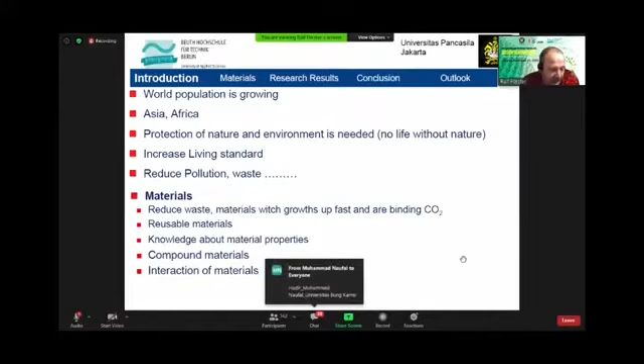We try to develop compound materials, and we must collect knowledge and experience about the interaction of different materials when we try to use the advantages of newly developed materials. We have to increase our knowledge and our skills, of course.

So we need other construction materials. We need some alternative building materials, as you know. The sand for mixing concrete to building beton is decreasing, and the prices for this material are increasing very fast.

One of our alternatives is wood. In Europe it's well known as a material for houses, for devices, and so on. Everybody knows this.

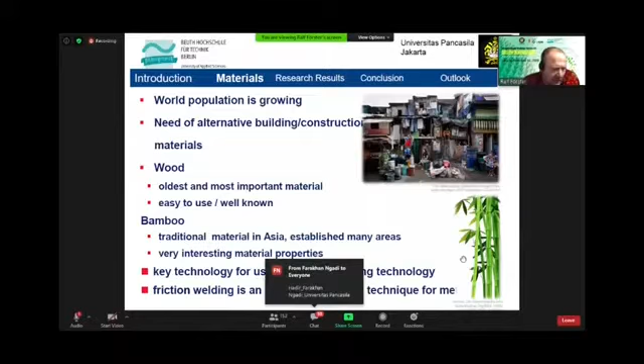In Asia, bamboo is well known as a traditional material with very interesting material properties. But we need some new technologies to use bamboo, like joining technologies. We have investigated in the last year the friction welding process on bamboo and wood too, and I will tell you something about our results and our ideas for new materials.

All of you know bamboo much better than the Europeans. The structure of bamboo is similar to wood, and the basic properties are also similar, but bamboo is a member of the grass family. It's not a wood, it's a grass.

There is a hard outside and a soft inside. It has very tear-resistant fiber strands, and most bamboos are divided by knots. The tensile strength of the bamboo grass reaches values up to 40 kilonewtons per square centimeter.

The main content of bamboo is cellulose and lignin, which is also similar to wood. Very interesting and very important for the connection of bamboo with the friction welding process is the content of lignin. The lignin content in bamboo is similar to wood, and that's why we can use our experience in friction welding of bamboo also for the friction welding of wood.

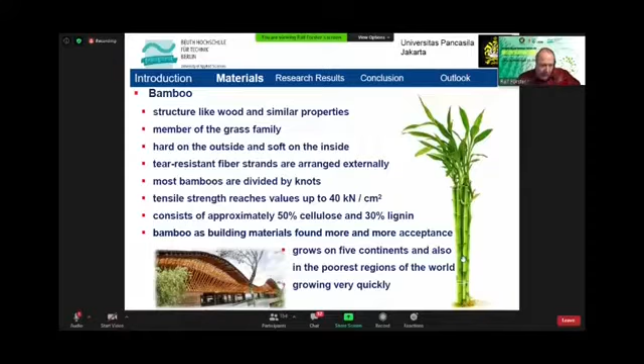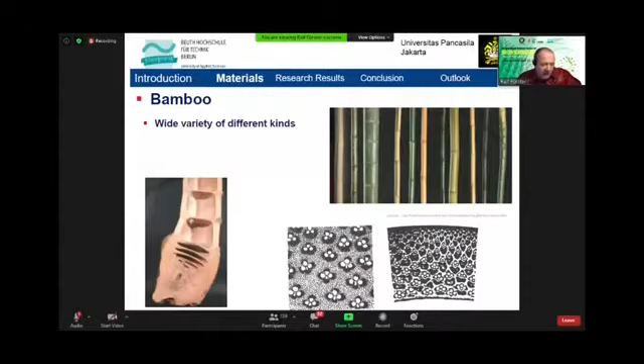Here are different pictures, cross-sections of different bamboo types. You know, there are a lot of different types and a lot of variety of bamboo. Here are the knots - this is a cross-section of a bamboo stem with the knots, the hard outside, and the empty inside with very stiff knots.

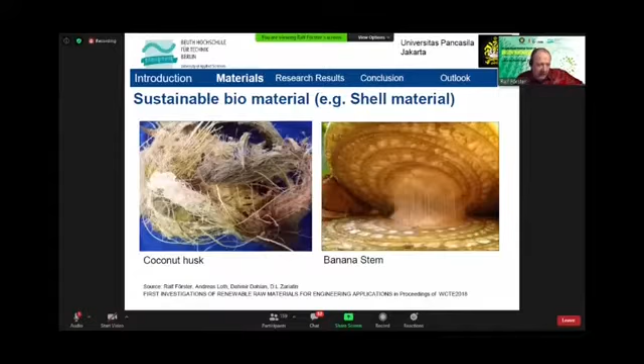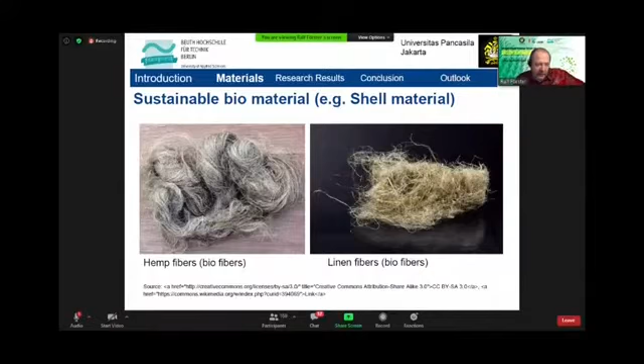So what are other sustainable, very interesting biomaterials? Coconut husk, banana stem, banana ropes, palm tree fibers - those are biofibers. These are very interesting for the next step, for outside material of sandwich materials, lightweight sandwich materials, like hemp fibers, linen fibers, and so on. There are a lot of ideas and opportunities to use such materials from a bamboo system.

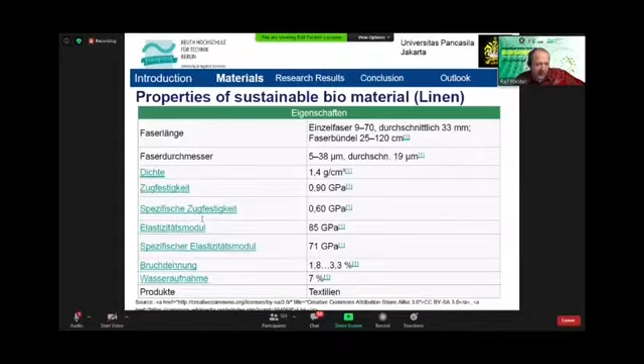We have some properties of such sustainable materials like linen, also for hemp. These are very often used in Germany or in Europe for ropes, for clothes, for pillows, and so on. But there are not so many applications with a technical or industrial background.

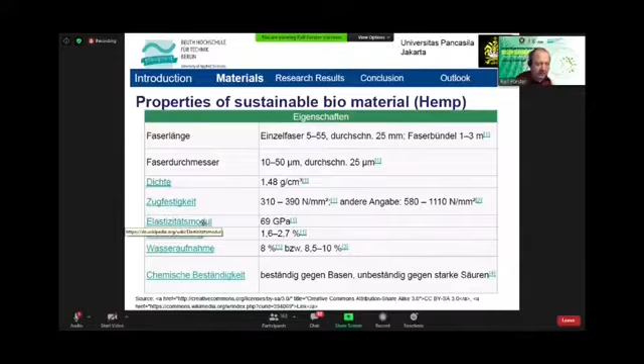But the advantage of biomaterials is that after using them, at the end of their use, there's no hazardous waste. They have no negative influence on the environment, and we can use them independent of our Earth's resources. But we don't have such standard values.

We don't know the properties of Asian biomaterials, like banana trees, like coconut fibers, and so on. And that's why we have to do a lot of research with these materials.

Last year was the year of Corona, and we didn't have the chance to exchange our knowledge. We didn't have the chance to travel to Indonesia to get more information about the Asian fibers and so on, but I guess next year we can cooperate together and try to find out more properties, and can increase our research in this topic.

So what we have done in the last year is install a cooperation with a Netzsch company. They are developers of special material testing machines. We have different chambers - we can adjust the chamber temperature between minus 160 degrees up to plus 500 degrees. We can measure different deformations of this.

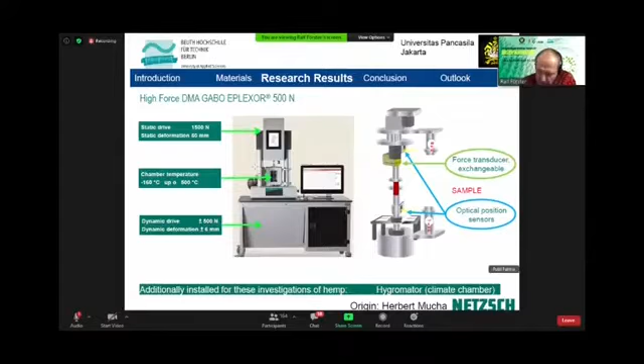Here are some tests which we have carried out with hemp fiber. We have a constant temperature of 25 degrees and a constant humidity of 20%, with a time sweep which increased the humidity stepwise, and temperature sweeps between 20 and 80 degrees at two constant humidity values of 40% humidity and 60% humidity.

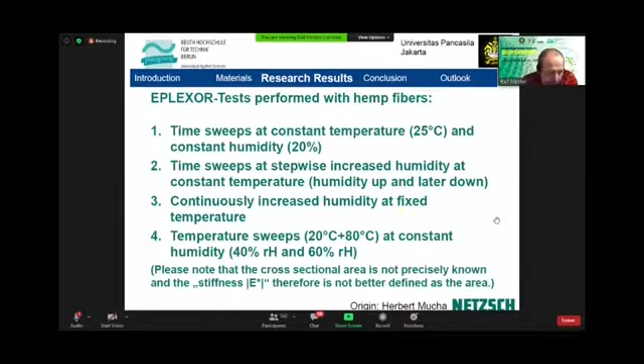So that we can collect first data with hemp fibers, we are trying to install new clamping systems for measuring really single fibers, very thin single fibers of our material, and we have seen how the behavior is changing during the time.

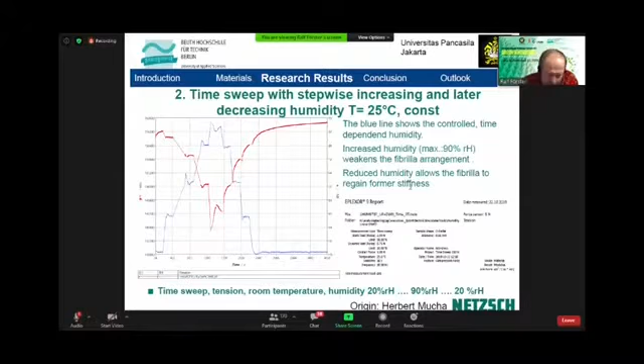Here are also some results with different humidity values and what happens with the stiffness of our material. Here are some other results about the tension, depending on different static loads and dynamic loads at a fixed temperature and with a continuously increasing humidity.

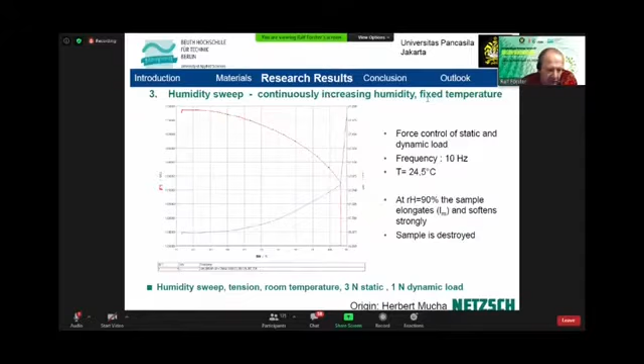Here are some other results. These are also results from one single hemp fiber, but for the future we must collect much more values for different materials and with different testing environmental conditions.

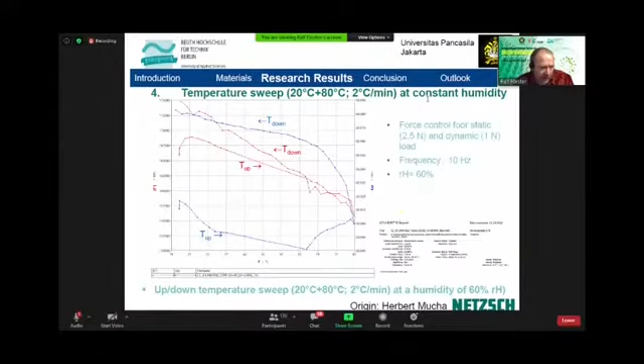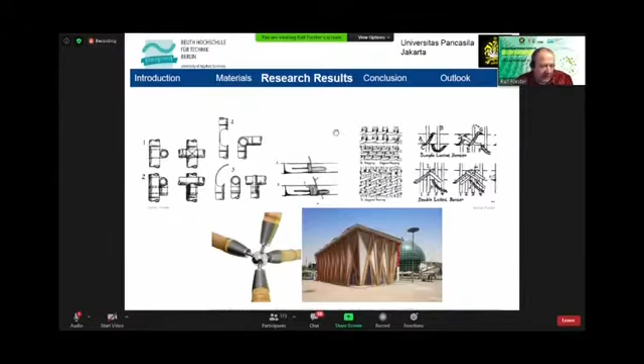What is a main problem of our research are the connections. Here are some traditional connection systems of bamboo and wood. We can join this with some ropes, with seals. We have metallic joinings. We can connect it with some bands and so on, like fibers, like thicker fibers, and so on.

But the demands for joining technologies are these: the connection should be free of chemical glue. It should be sustainable. We want no hazardous waste, and the connection should be reproducible.

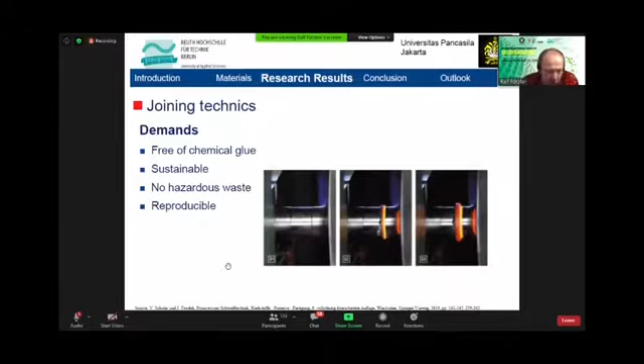This is a standard technology for friction welding. Yes, it is. As you know, the Germans like to make tables, to make standards and so on, and also the friction welding process has its own standard. We have the welding through movement. This means there is no external heat, no flame, no plasma, nothing.

We have an ultrasonic welding. We have some sonotrodes in this ultrasonic welding. This is very often used in the electronic industry, the semiconductor industry, like ball bonding, like ultrasonic bonding, if you want to connect the very thin wire of integrated circuits with the outside plating. This ultrasonic welding is used, I guess, in 99% of all connection processes, joining processes in the semiconductor industry.

We also have an ultrasonic welding process in the packaging system. If we cover some very sensitive devices, electronic devices, with some sheets of plastics and so on, the connection process very often uses also an ultrasonic welding process with a sonotrode. Then on the other side we have a friction welding process.

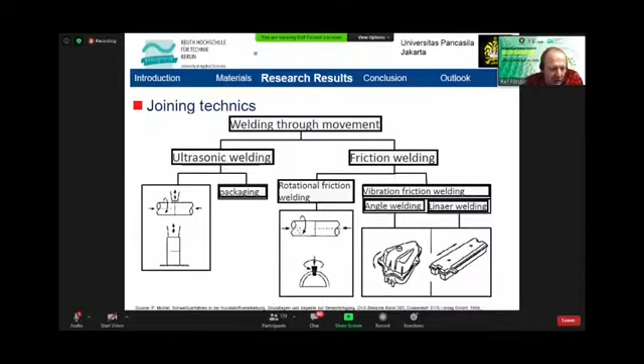Okay, and this is what we are doing. We have one fixed part and the other rotated part with a pressure force for the connection.

Here are some cross sections of linear friction welding of wood. This is real beech wood, and here you can see also the debris outside of our welded zone, the thermal influence zone, and there's also a friction welding process for a cylindrical connection joint in one borehole.

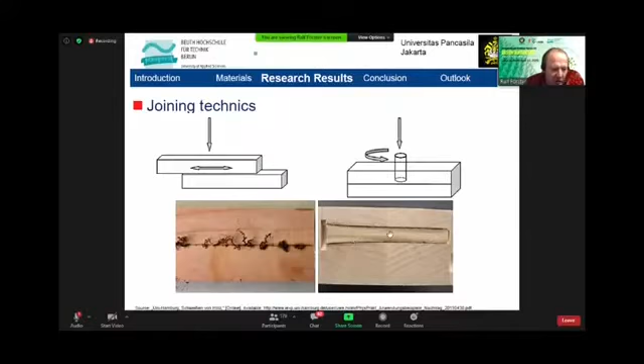What can we see when we have a cross section and look inside of our friction welding zone? We have a compacted cell structure on the top, and down we have also a compacted cell structure, and in the middle, where is our connection, we have pyrolyzed mass. That means it's a mixture of carbon, a mixture of lignin, which is used as a natural glue, something like that. After high temperature without burning, we have

Natural glue, a sustainable glue, which is used for the connection of our different wood or bamboo types. Some advantages of friction welding of wood and bamboo are the connection can be established quickly within a few seconds. We don't use some additives. We can combine different wood and different bamboo materials. We can adapt different types of wood, different types of bamboo for the combination of different behavior and for different

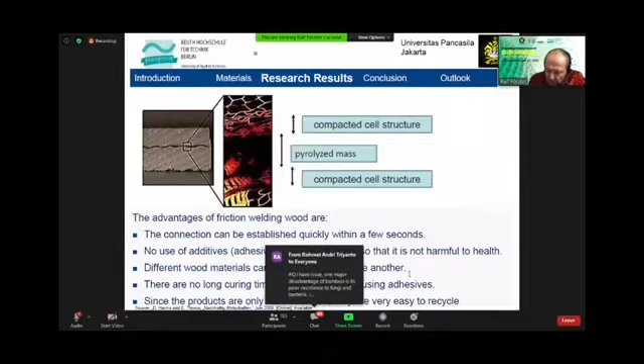So, 3 years ago, or 2 years ago, I have shown you our first initial test. In 2018, we tested pine and beech with our standard turning machine. I hope you will remember what we have done.

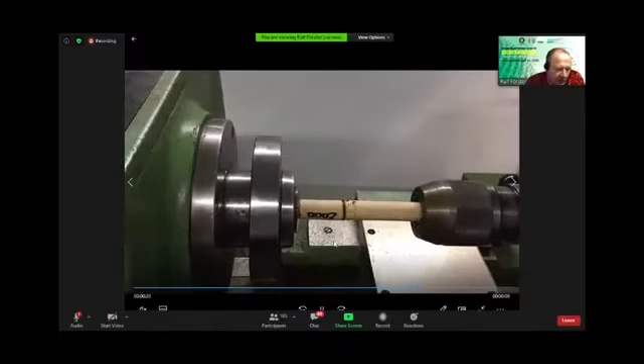I will show you our first videos about this. I hope you can see the video. Yes, we can see, Prof. Okay, that's great. That was our first test equipment. It's a standard turning machine. It was very easy to use. It was a fast start, but the first steps were really successful.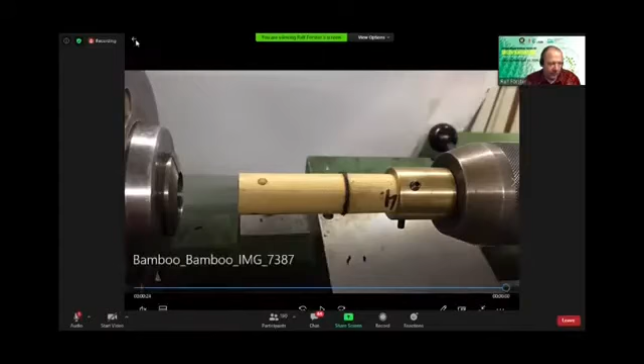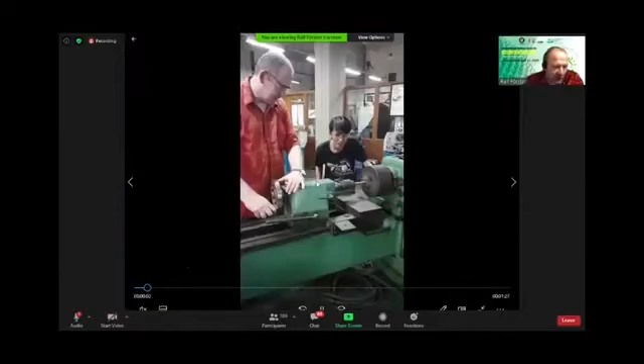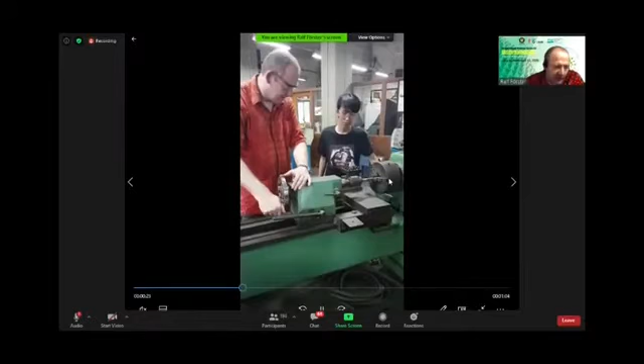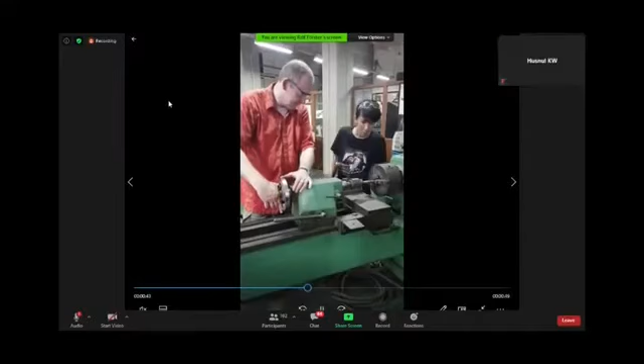So, and as you know, it works also in Indonesia. We carried out a similar test at Pancasila University with original bamboo from Indonesia, and as you can see, it works in Indonesia very well too. And we got the same results, and of course in Indonesia we have bamboo with a thicker diameter, and then we have also a higher stiffness and so on. And as you can see, it worked in Indonesia in the same way as in Germany.

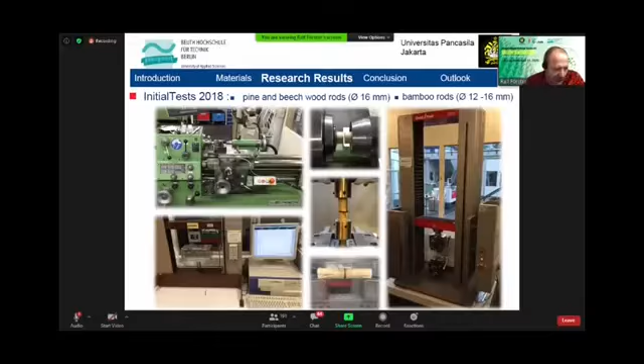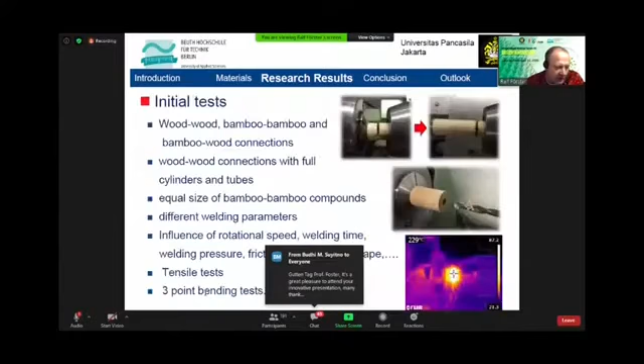That's great. That was our first steps 2 years ago, and we carried out a lot of tests about the welding time, the welding pressure, the path length, the speed rate, and so on. 3-point bending test, you know all this, but the big advantage is I got the funding from the German government together with an industrial company to build up

a special adapted friction welding machine, especially for wood and bamboo too. Here's a short look inside the machine. This is our clamping system for the rotational part. Here is the clamping system for the fixed part. Yes, here is a different view. This is our turning part, and here this is a fixed part of our product, and then we can combine this, and we have

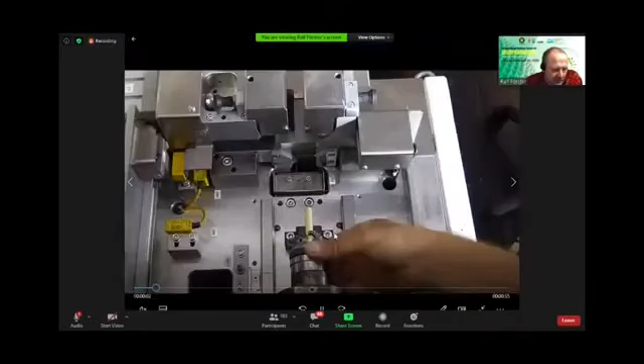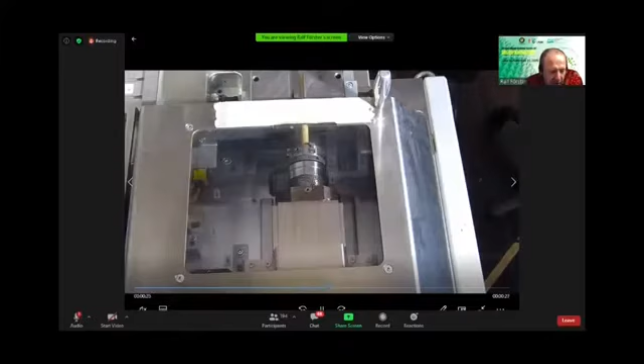made a lot of tests, as you can see here in the video. This very hairy arm is my arm. And we can adjust the pressure time. The system stops very fast. We can adjust different after-pressing times, and so on. We can adjust the rotational speed and so on. And as you can see, it's stiff and hard.

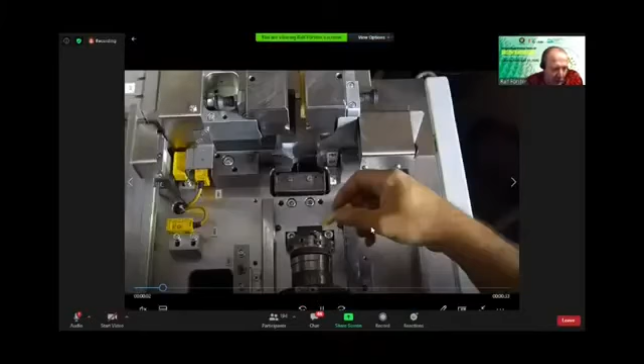Of course, not each test works well. Here's one of our failure videos. Not each project in Germany is a successful project, and not each test is a successful test. As you can see, nothing happens. No smoke, no temperature. There's nothing.

The problem is the friction on both parts of the clamping system was not enough, and that's why we put it through the clamping system.

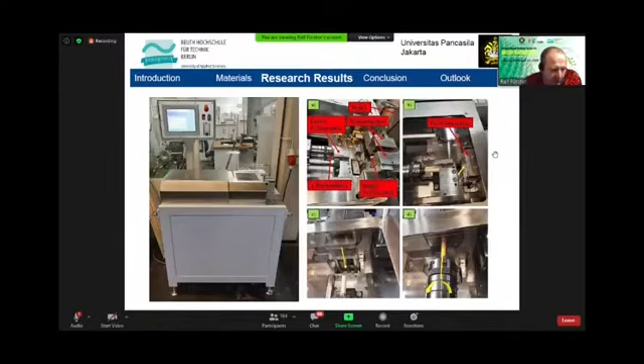Okay, these are our new equipment. We got it 1 year ago, that was finished, and since this time we carried out a lot of tests and a lot of new results. We create a lot of new results, and we have increased our knowledge about the process.

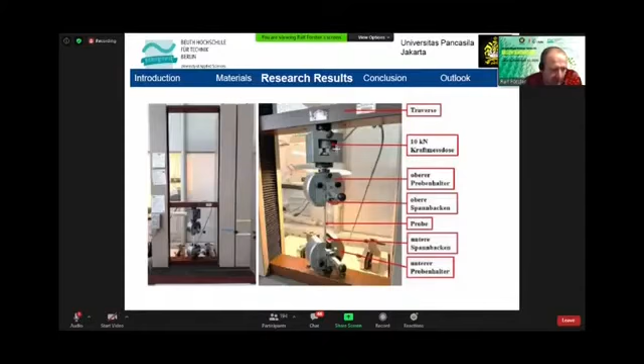This is our testing equipment for the tensile strength test. Yes, it's a standard system of the ZwickRoell company. Here are some results of the tensile strengths of pine. Here the tensile strengths, and here are our different samples with different test parameters. Yes, and as you can see, we have a strong influence of the testing parameters. Of course, we could identify the best parameters for the pine and also for beech wood.

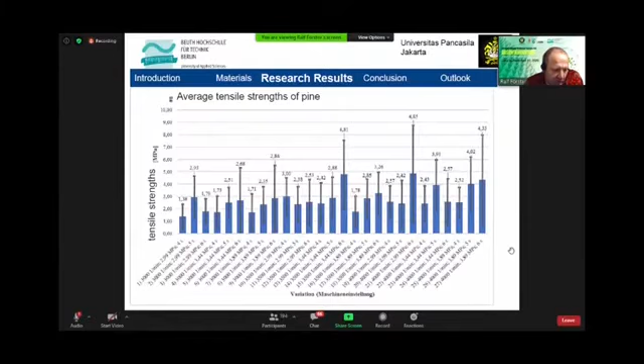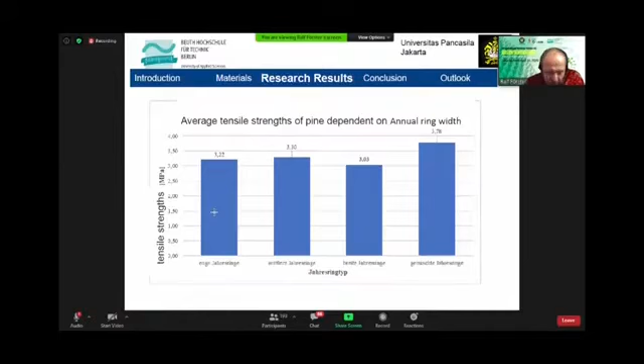What is a very interesting result: we have different results depending on the thickness and width of the annual ring of wood. This is not independent from the structure of the wood. That's a very interesting result - we have an influence of the inner structure depending on the ring width in the wood structure. So here can you see?

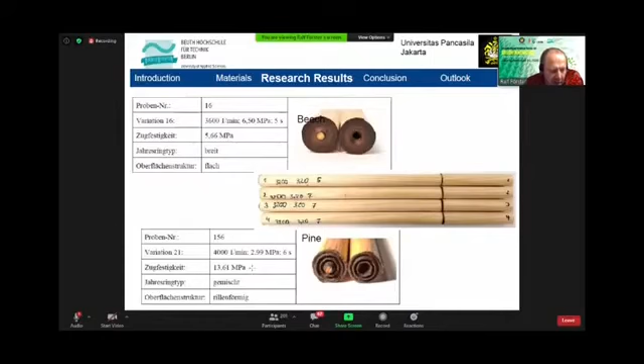Here is the pine, and as you can see, these are the different wood annual rings in the wood structure, and this is also like a gluing connection, an additional joining connection. With the pine, in most of the samples, it's a problem - it's the influence of the pine wood. When we look at the beech wood, we don't see such behavior. It's really a different difference of the wood material, and as you can see, the tensile strength of pine is 2 times higher than that of beech.

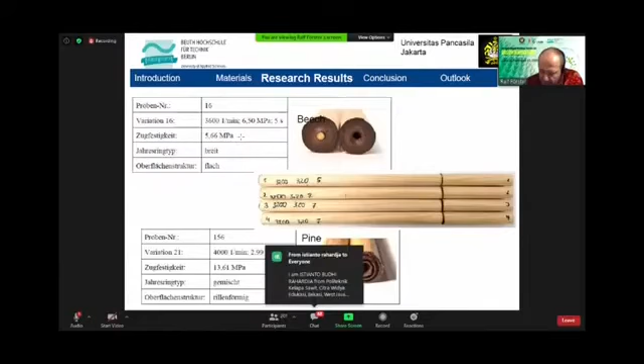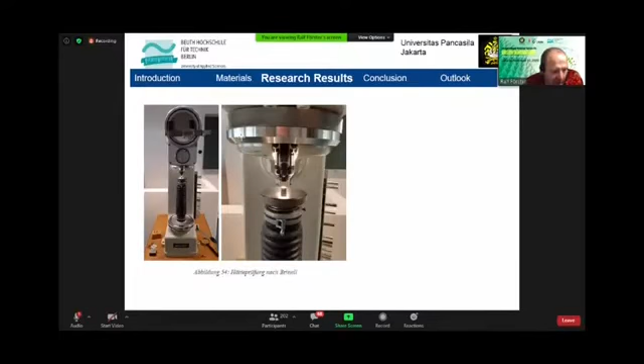What was another effect? We have tried to test the hardness of the single annual rings, and that was really interesting. We have early wood - this is much softer than the late wood, and you can imagine that we have different friction properties, different pressure forces on this material. This is a piece of one natural growth beech wood.

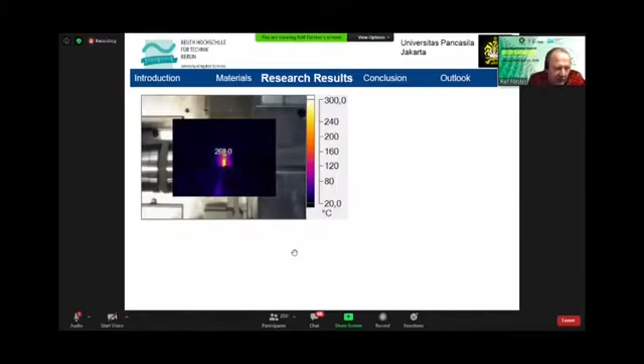So okay, here are some pictures with a thermography camera. We need temperature in the range of 300 degrees, and we could see this with an infrared camera. And we have also a computer tomography system, and here can you see the welding area.

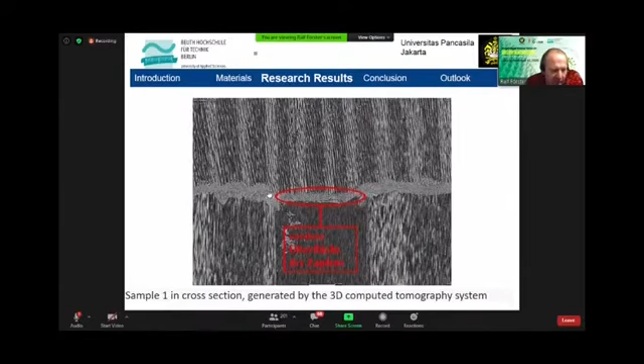And here are the different wood types, the different wood structures. These are similar to the different density of the annual rings in the structure, and that's why we can find a different behavior. As you can see, this is also in a picture, and you can see the borehole inside in the middle of our test equipment, and how it works and how it connects in this welding zone area.

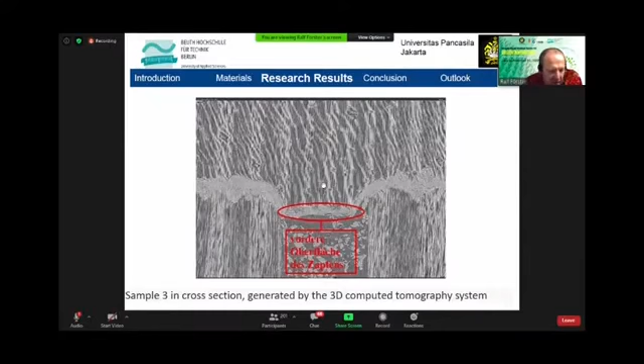Here, a similar different sample - it's sample 3, and here are similar welding zones. It's comparable to the other pictures, but the structure of the ground material is a little bit different.

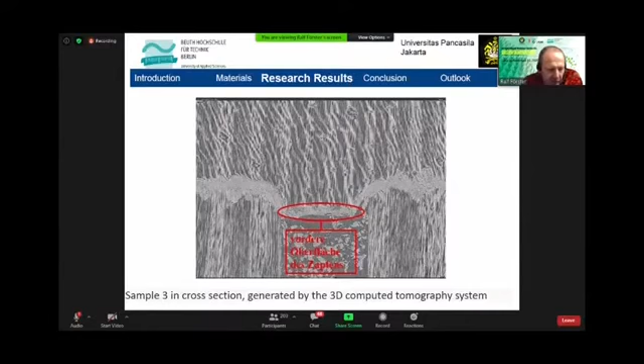Okay, what we also did: we compared the friction, the tensile strength, which we reach with friction welding. The average value was 3.3 megapascal. And when we are using different glues like Ponal Express after 8 minutes, after 13 hours, Ponal water glue, and also Ottocoll - these are German trade names.